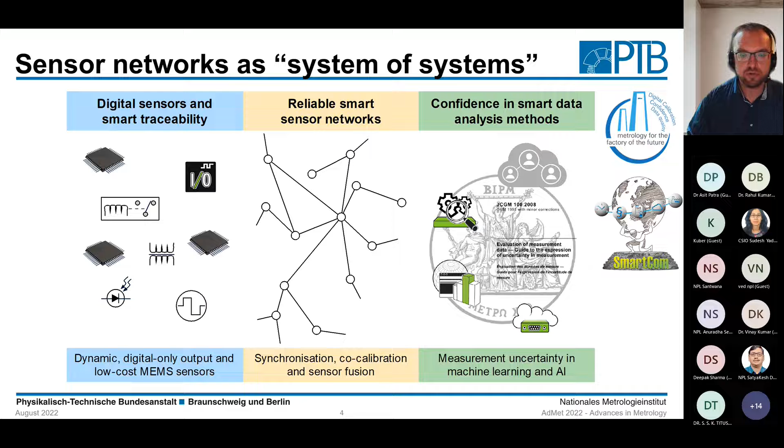You see many challenges ahead of us as metrology institutes and laboratories.

Even when you look at individual sensors, we see increasing complexity. Of course, that's nothing new—we metrologists are used to instruments becoming more complex in their evolution and development. But we see a kind of disruption in the last couple of years because of the increasing integration of digital technologies into sensors. So you have more and more a combination of the actual physical measuring elements and digital elements, the software.

The software may try to compensate for unwanted effects. It may combine several measuring elements inside the instrument to derive a measured value. Or it may do even more, like an internal calibration based on some reference already integrated into the box. This is challenging for metrology because, at first hand, we don't have access anymore necessarily to the actual measured values, only to the pre-processed values.

Does that mean our calibration standards are still working for this? We don't know yet, or at least I haven't heard of anyone who knows that for sure.

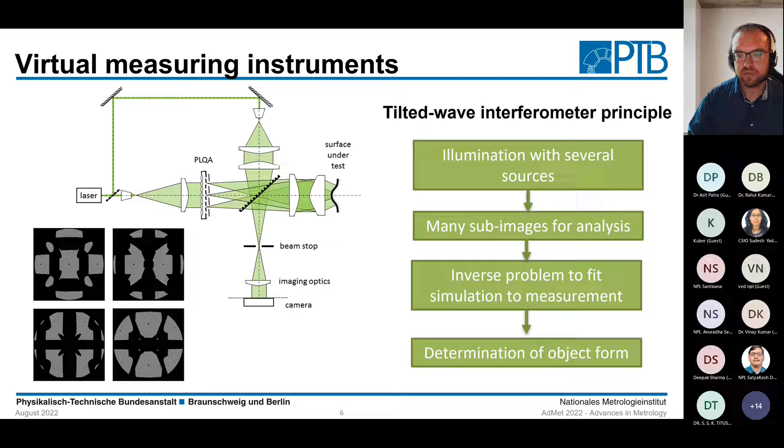Then in a simulation, you adjust the model of the surface under test, your measurement arm so to say, until the simulated pattern looks as close as possible to the measured pattern. Only this combination of physical and simulated measurement gives you the measurement result. How do you calibrate such a thing? How reliable is it? What is the quality of this? Many questions need answers when we want to have metrology available for these kinds of instruments.

Metrology institutes are only one, an important but only one element in the quality infrastructure, in the assessment and assurance for trustworthiness of products and services. It starts with the development of a product, then you have the conformity assessment, the manufacturing, the product is distributed on the market, it's in operation, and then at some point in its life cycle, it is recycled.

Now, with digital transformation, we see more and more examples where this physical life cycle is accompanied by a data life cycle. So you have data that is created in the design and development process, the data from the conformity assessment, the data that is gathered in the field during the distribution and operation of it, and that then may later also be used for the recycling.

Of course, there are many bodies, institutes, companies, and places where this digital information can be enriched. Right now, it is distributed across various bodies and data places. In the future, though, this information may be gathered together, summarized into what we call a digital product passport. Because this gives us a lot of benefits.

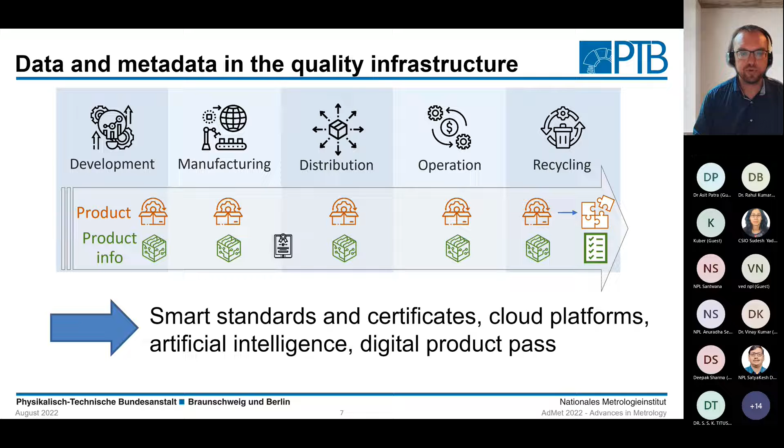certificates in metrology and conformity assessment. The increasing use of cloud platforms to bring together different data sources. The use and integration of artificial intelligence and early steps towards a digital product passport.

Again, many different institutions and bodies and areas come together here. We have the regulatory framework, the standardization, and then the metrology, accreditation, and calibration interplay for the non-legal metrology part. We already see developments like digital certificates for calibration and testing, the early steps in end-to-end digital processes with the aim to make the quality infrastructure more efficient, but also with the need to have harmonized interfaces and data.

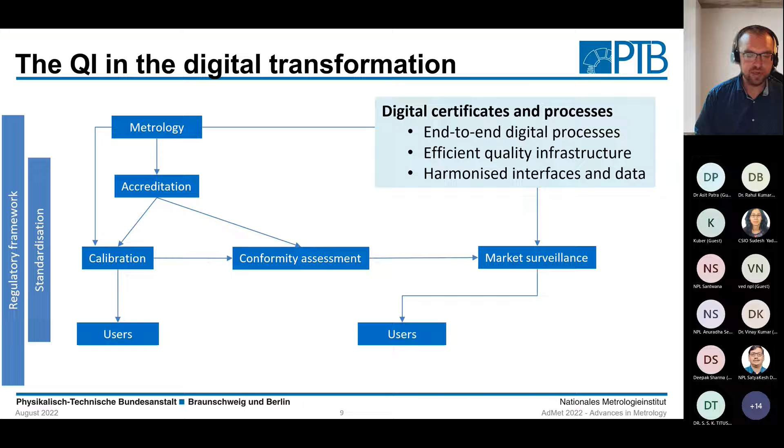And the needs here become even more clear when you look at the legal metrology part of it. Here you have the conformity assessment and market surveillance that also need to be taken into account. And of course, this needs to be interoperable with the developments in accreditation and calibration for the non-legal metrology part. So we need to work together in order to have an interoperability of the developments.

And to start this interoperability, let's have a look at what is going on in the standardization community. Just recently, there was published a white paper on scenarios for digitizing standardization and standards. And in that white paper, they have presented these 5 levels of digital maturity.

It starts with level 1, where you have a digital document, so the standard as a PDF document, for instance. Level 2, you have a machine-readable document, so you have some structure in the document that can be used by a software to extract certain information, certain paragraphs from a search, like give me all the definitions or extract the requirements and so on.

Level 3 is then going even further by having machine readable and executable content. So you have the information that is contained in the standard provided in such a way that the machine can extract the information, not only the text paragraph. And machine interpretable content means that the machine can also work with the information itself.

Then the white paper adds a level 5 to that, looking far in the future, and that is machine controllable content, saying that a software may be able to adjust a standard or compile a standardization document. Of course, there are many things that are required to achieve this level 5, and it's clear that this is something we will not see in the next 5 or 10 years, but maybe in 15 or 20 years, first steps in this direction may be seen.

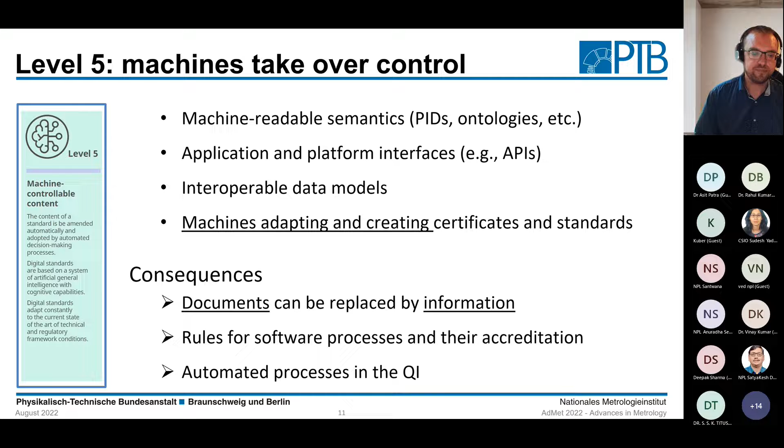It may be of interest and you may be curious why it's so, but you don't need that information. You only need to know: will my flight be delayed? Will it be cancelled? Because then you have to take some action, and you need a high level of confidence in that information. If it's wrong, and your flight is not actually cancelled but you take some action, then you're losing money and time, and of course you're angry. So this is an example of extracting the information you need at a certain time without needing a document or the whole set of information at your fingertips.

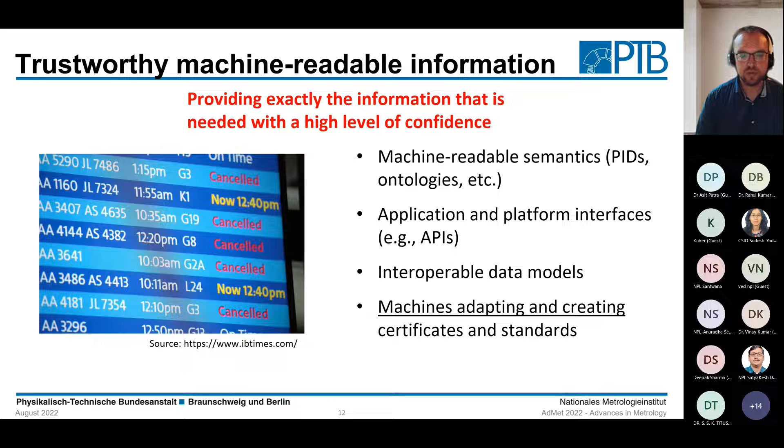Of course, we start where we are now, and in most areas this is level 1: we have a digital document. We may provide the certificates as a PDF document. Standardization communities are already providing standards as PDF documents for download. But how do we create those?

This process can also, and needs to, be digitized. That means, first of all, that from the placement of the order to the provision of the certificate, we have a working digital process internally, that we can use electronic signatures and seals not only internally or nationally, but accepted internationally - which is not that easy. And we then provide the certificates and reports at least via email, so digitally, ideally over some customer platform or service provider.

Already this step can be challenging when you want to do it right. Doing it right means that you don't have different islands of digital solutions in your process internally, but that the data coming from the customer's order placement is used in your internal document management system together with all the metadata. This metadata is then automatically provided to the laboratory, to the place in your institute doing the actual examination.

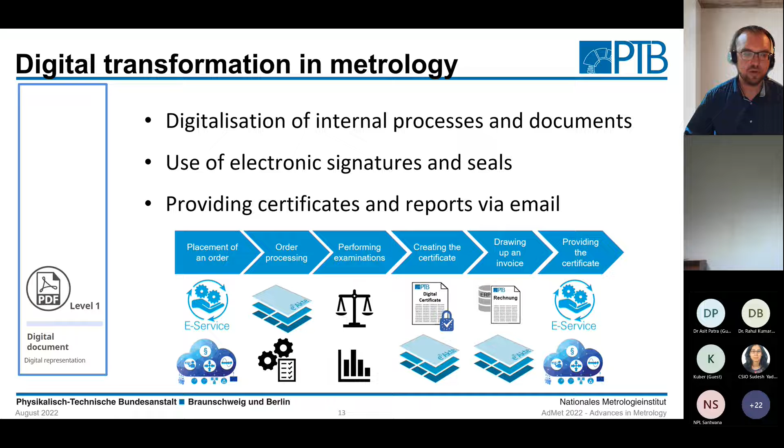Like calibration or conformity assessment - so that this information can then be enriched, provided, and put into the certificate, and then an invoice is created and the certificate is provided. So the information is handed over from one step to the next without a human needing to manually type something in, copying and pasting it from one platform to another. To do this right is already a challenge, depending on how well prepared you are with your processes.

From this, we can then go to level 2. That means we have to break up the PDF document and use something that provides us with a structure that can be searched for. Like you may have, as in an XML document, certain structure elements saying 'here's a measurement result.' And then within that measurement result you may have certain substructures, like in a hierarchy, that you can again search. So you can then write software that extracts the information.

Of course, it's still a manual workload, because as a human you have to look into the structure of such documents beforehand, and you have to very carefully prepare the software and so on. You can, however, specify the type of information easily in such a structure, and you can then have the software parse the document to extract that structure.

For instance, you can have software parsing all the measurement results in a digital calibration certificate, and then printing them out to you on the screen, or providing them via an interface to another platform in your process.

One example where we can go beyond calibration certificates and certificates of conformity is if we were to take the existing BIPM International Vocabulary of Metrology, the VIM, and further develop that into an XML or similar structure, where you can have a searchable structural hierarchy of terms, higher terms, relations between terms, and so on.

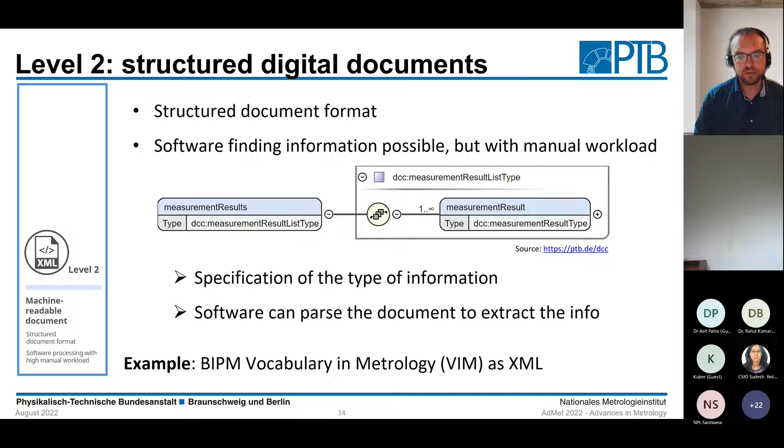Still, the information contained in the definitions in the VIM, the information contained in the individual measurement results elements, is not machine readable. This would require level 3, meaning that the actual content can be discovered and understood by software, meaning the relation between different interfaces, between different sources, can be understood by a software. Is the word 'force' or the representation of the unit of measurement in one document related to that in another document or in the database that I have here?

When I want to integrate the information from a digital calibration certificate into my existing internal database of measuring instruments, I need to have information about such relations. Otherwise, it's still manual work to adjust units of measurement, to adjust values, to adjust taxonomies, vocabularies, and so on. With level 3, we can do this automatically based on further detailed XML tags specifying the different elements.

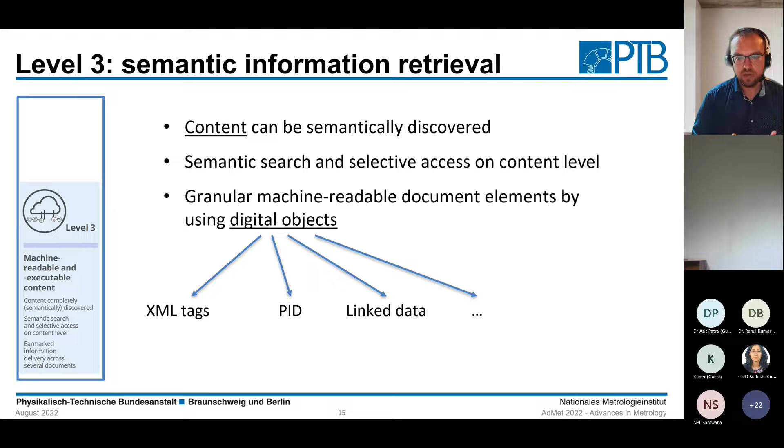Persistent identifiers, for instance, an identifier for a certain unit of measurement that we can refer to. When it's in one document using the same PID as another document, or in the certificate the same as in our database, then we can be sure that it's the same unit of measurement and it's related. Or we can use linked data, which is a structural, semantical way of describing the meaning of vocabulary and semantics. It means that we have to become much more granular in the way we specify the documents.

Here's one example of how that may look like. You may have in a digital calibration certificate a measurement result that in detail looks like this. It has a label, you're saying it's a force value. You have the actual value, and they have the unit of measurement written in a machine interpretable way. There are many different ways on how to structure this. This is one example.

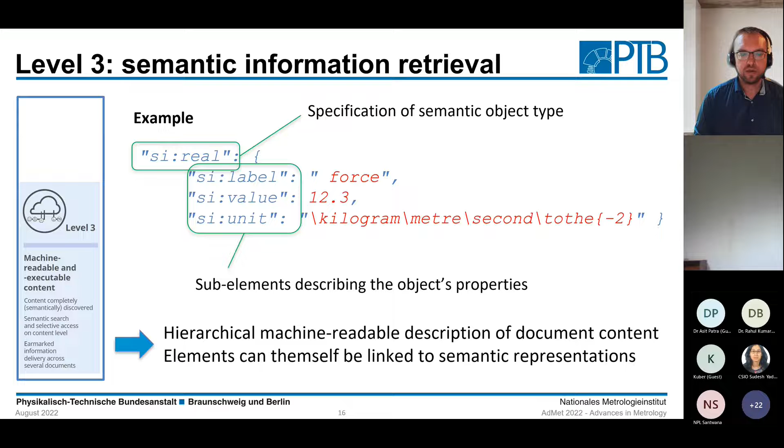This can be implemented quite easily in existing documents, but of course we have to have interoperability, so we have to at least find a way to how to harmonize and interpret these beyond different domains and use cases.

Level 4 now extends this even further by also having the context of, for instance, the measurement of force available in a machine readable way, so that you can extract the information and make use of it automatically. So you have the software automatically working on the data without a manual workload, like the integration of the information from a calibration certificate into your internal database, or the interpretation of a standard to automatically adjust the calibration infrastructure or setup in your lab so that you can perform a calibration based on that standard, or at least check whether your setup is in accordance with the standard.

However, it means we have to replace the now often implicit definitions and interpretations in our standards and guidelines by some explicit semantic relations, because we don't want the machines to interpret wildly what to do with the information. We want to be sure that when we have automation, it works as expected.

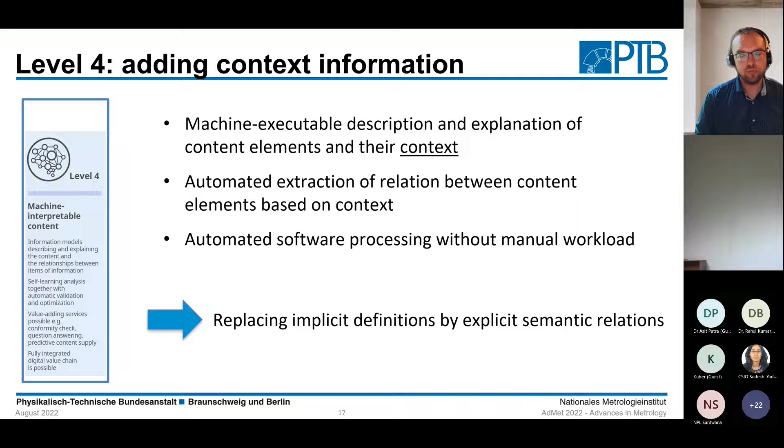It starts, and we are working on that internationally, on the digital representation of units of measurement. It also means we have to make documents like the SI brochure and the VIM machine readable. First of all, because it is a way for us to learn how to formulate things. It can then be a kind of template for other areas, for guidelines and calibration, for standards in metrology and so on, that can use the way we use in the machine readable SI brochure and VIM, and take that up in other areas to again have interoperability. It also means we have to talk about interoperable terminologies and vocabularies.

The VIM is a starting point. We have the basic vocabulary of metrology there with human interpretable definitions. It's only a glossary. When we have a high level of automation, according to this graphic here, we need to go beyond the glossary. We may need, depending on how much automation we want to have, to go up to ontologies - so explicit semantic representation of definitions, relations, and interconnections between terminologies and vocabularies.

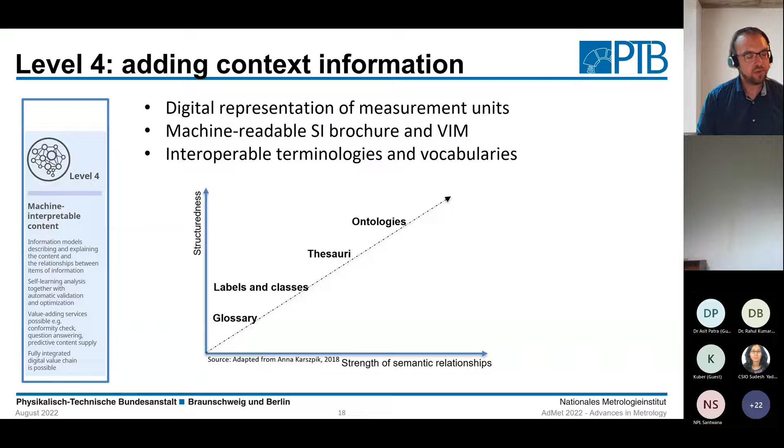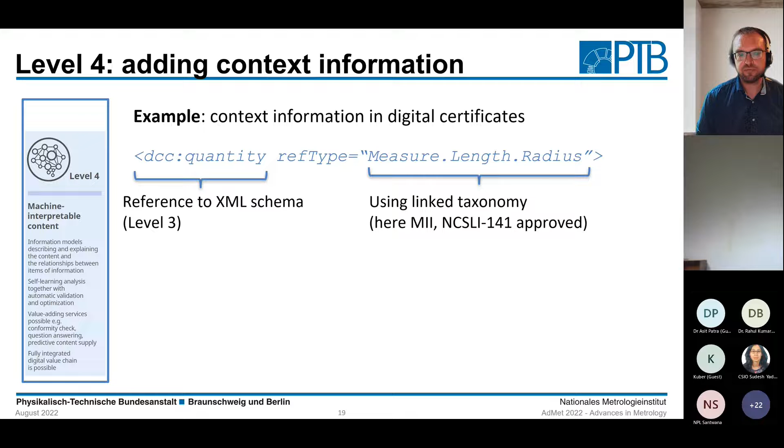One example where this is of use, again with the calibration certificate, is that we can specify using a linked taxonomy what this measurement is about. Here it's a measurement of the radius, the length of a radius. So the context can be interpreted by software, relating this information to information from another source, enabling automated integration and use of the certificate's information.

And this is necessary because we are not doing this for our own purposes. The certificates we provide in metrology are used in accreditation, in calibrations further down the calibration hierarchy. They're even used in conformity assessment and market surveillance, and finally by users for their internal quality management systems.

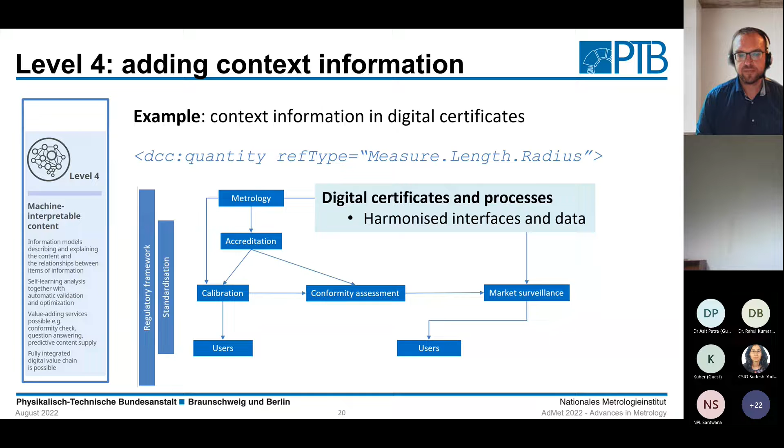To take a step back from all these semantics, ontologies, and technical details, let's sum up why we do this. There is a digital transformation in society and economy, and we have to address these developments, including more and more large-scale networks of sensors with flexible topology, meaning sensors being added, having failures, or even being mobile, placed on a car, other vehicles, or a drone.

People use dashboards to assess the situation and the data, compressing the information, meaning individual measurements are not as important anymore. We will see more and more data-driven decisions and automation based on individual measurements, but increasingly also on networks of sensors.

It also means algorithms and software will become as important as the actual measurement, with more sensors integrated with digital technologies, software and algorithms trying to compensate for unwanted effects or combining elements of different measurements to derive a measurement result.

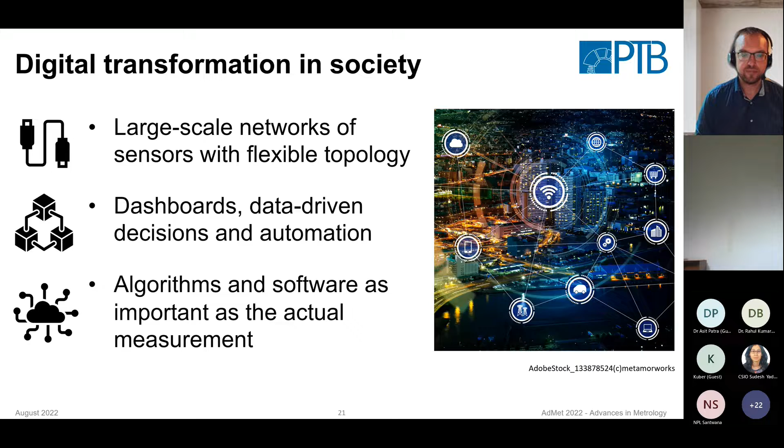It means for us that we will have more possibilities and opportunities for our own digital transformation, so automated processes in our laboratories and institutes. We will be requested to have digital interfaces between our systems and those of our customers, like providing the digital certificate not via email but directly via a suitable cloud interface.

We will have to build up competence in data science and artificial intelligence applications because, to be honest, this will be the future. These systems will be integrated into metrology systems, and we'll see more interplay between cloud infrastructures and on-premise solutions, meaning not everything will be in the cloud; we will have localized solutions for measurement and for provision of services and data.

Thank you very much, and I hope you have some questions.

Thank you very much, Dr. Antoine, for that very interesting and very comprehensive presentation on this very topical issue. Now, this is open for discussion.

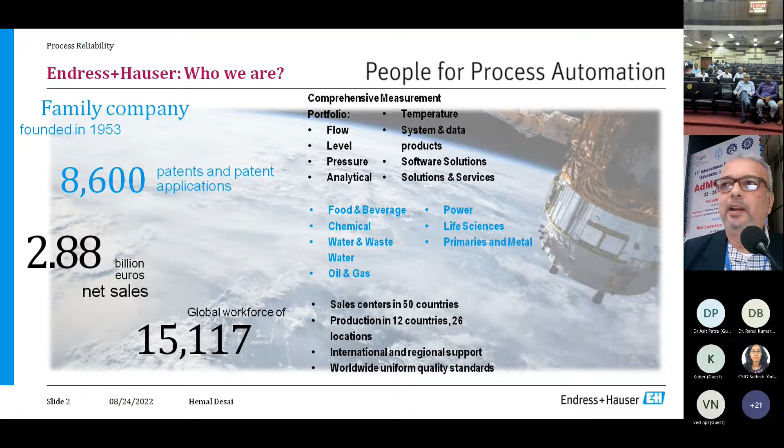We are part of a Swiss company, and as you know, Swiss are very precise. You hear about Swiss banks, Swiss chocolates, Swiss watches. But many people are also aware that Switzerland is a land where a lot of precision instruments are made. Endress+Hauser has been in the process industry for the last 70 years, making very high precision process instruments and technologies. So I represent the company. We have been in almost all process industries, including food and beverage, power, life sciences, biotech, chemical, oil and gas - any process industry you go, you will find our equipment being used for the last 70 years. In India also, we have been present for the last 40 years now.

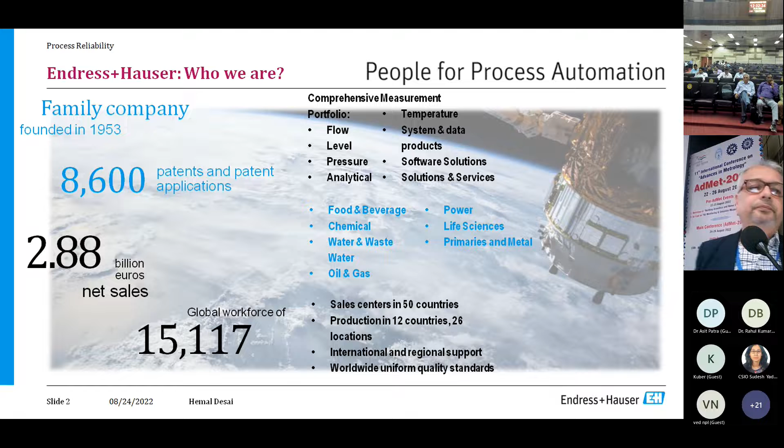So when you go to a process industry and talk about reliability, reliability means different things to different types of people. Some people think of reliability as how well I am able to control my process. So if you ask a process engineer or a person basically looking after the process or quality of the product, he is worried about how well he's able to control his process.

There are people who define reliability as reducing risk - how much risk do I have in my plant? There are some people in the industry, mainly maintenance engineers, who want to avoid an unscheduled shutdown. They're worried about what percentage of the time in a year is my process available to me for production. And then there are utility engineers who worry about how to reduce energy consumption, utility consumption, and the cost of producing the product.

So these are different definitions - different people look at reliability in different ways. What we are going to focus on in this presentation is basically the quality perspective and the cost perspective, and we'll also look at it from availability and safety perspective. So we'll try to combine all of this from a process instrumentation point of view, and I'm going to present a couple of slides from that perspective.

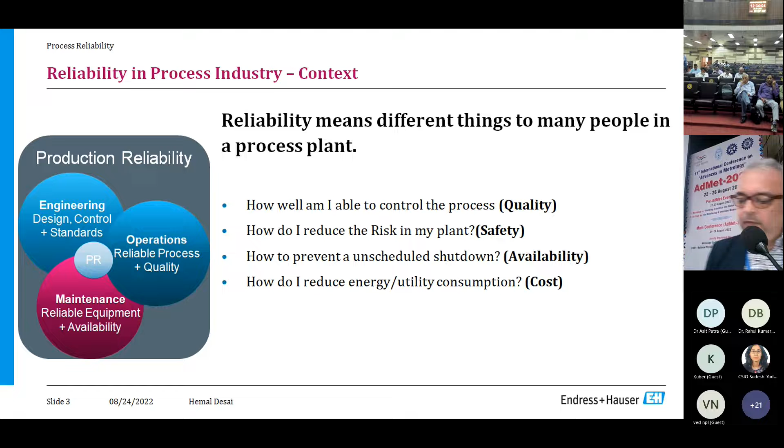So the reliability journey in process control starts from measurement. Measurement is the first thing, because it's popularly said that whatever you can measure, that only you can control. So if you cannot measure something, you cannot control it. And if you cannot control something, you cannot improve it. So all of these are related, and the first starting point of the reliability journey is measurement - that's where we come in, or that's where I come from.

When you talk about measurement, the most common dilemma today in a process plant is that you have hundreds of measurements being done. What is the integrity of that measurement? I am seeing some measurements on my control system screen - what is the integrity of my measurement? What is the confidence level I have in that measurement? And how do I ensure this confidence level is there all the time, and that my measurements are accurate in real time?

This is the most common dilemma you will find in any process plant - especially in some plants like oil and gas or food and beverage, life science, this is very critical, because your entire quality of the product depends on how accurately you can monitor the process values.

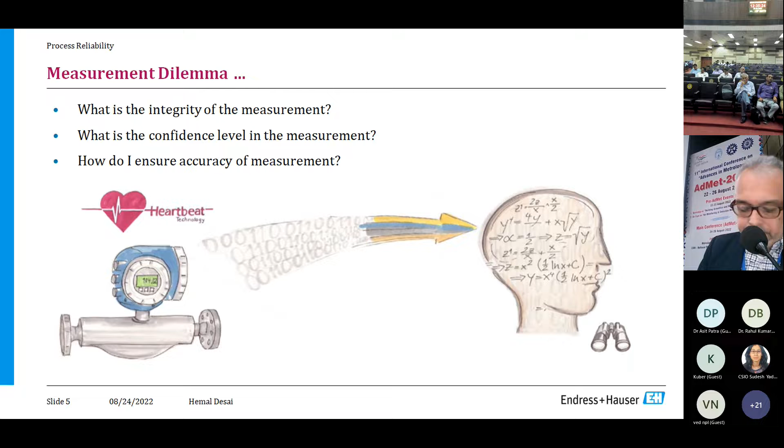Just to give you an example: if you go to an oil and gas plant, the expectation of a process control engineer would be how can I reduce the variability in my process loops. This is the key expectation of any process control engineer in any process industry - how do I reduce the variability in my loop?

Why? Because any plant or production facility consists of many such loops. And if you are able to reduce variability in all these loops to a certain extent, the end product you get out of this plant will be on spec - your quality of the product is A1. You want a certain quality of product, and this is what you will get if you are able to reduce the variability across all the loops. What we are essentially saying here is that if you can reduce variability, you have very tight control.

When you have tight control, you have quality on spec. When you have quality on spec, my cost of production is reduced, my utility consumption is reduced, my energy consumption is reduced. So I have the most efficient way of producing the product at very high quality. That's how a process engineer looks at it.

There are many variables which can disturb or affect this. For example, faults in any of the control elements or measurement elements—if there's any fault, then you are in for a surprise. Or the accuracy of measurement is also a variable here. Of course, there are many other process variables included, but I've just tried to pinpoint some of the variables which we'll be concerned with.

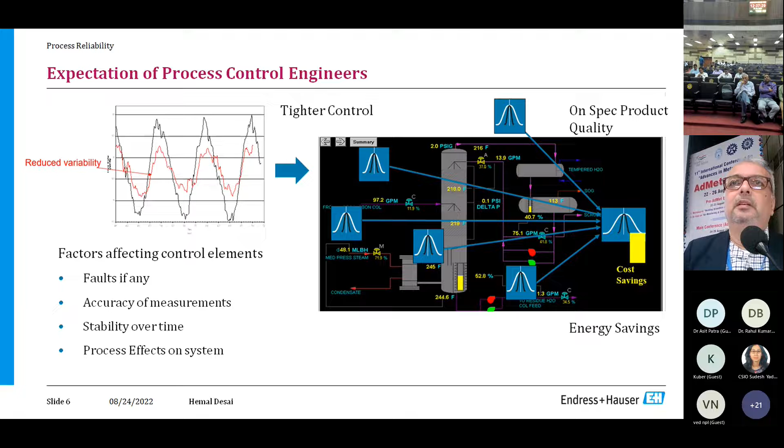Stability of measurement over time—how stable is my measurement? My accuracy may be fine, but if the measurement is not stable over a period of time in a process plant, then I have a problem. And there are process effects, which I already talked about. So there are some variables which really can disturb this process variability in a process plant.

So one of the most traditional ways of ensuring that we are doing a very good job in a process plant is to basically do a metrological calibration of the equipment, both measurement as well as control elements, over a periodic period of time. Typically when a plant is being started, you get equipment from the manufacturer, and before it ships, it's usually calibrated as part of the manufacturing process. Once the equipment is received at the site and put into operation, again most of the time the calibration is checked, and then you have a preventive maintenance strategy—let's say every once in a year—to ensure the calibration is still on spec, or to recalibrate the device.

So you establish a period of time. Sometimes it's the preventive maintenance strategy—every once in a year I would calibrate, let's say, a flow meter. Okay, so that's usually the case.

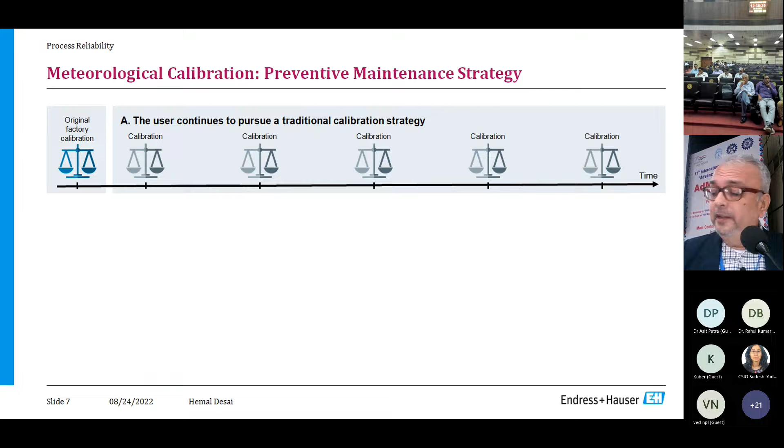But from an end user's perspective, this is an issue—you have to remove the equipment from the process for calibration. And some of the processes are very critical. For example, you have custody transfer process, or a process where you're dosing something or mixing something. Then it's very difficult to remove an equipment from the process because you have to disturb the process, stop the process, and remove the equipment.

Sometimes you have to send the equipment from one end of the country to the other, and this takes a couple of days. So you have no measurement during that period of time. And again, when you receive the equipment back, you have to put it back in line by stopping the process. So this is, from the user's perspective, something he wants to avoid.

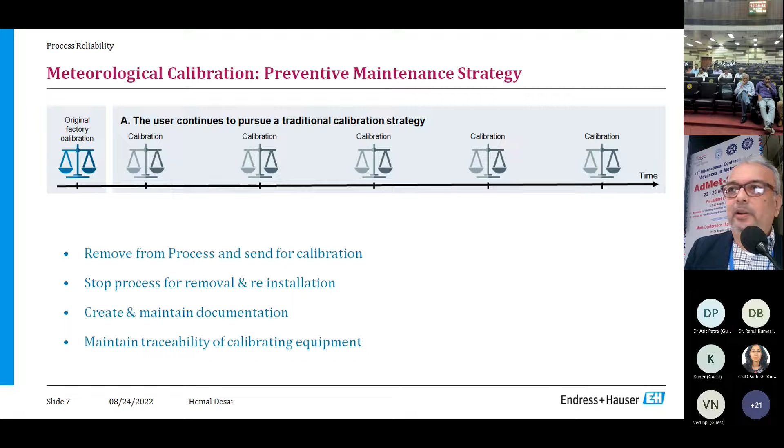And then there is documentation—you have to maintain documentation, you have to maintain traceability of the calibrating equipment, sometimes at the user's end or at the lab. So all these parameters play a role in how you maintain the calibration of the device. So what is the easiest way out? Don't calibrate. Most users, even though they have a preventive maintenance strategy documented, they don't calibrate. This is actually what happens in a process plant.

So Endress+Hauser realized this because we have been working with so many end users in process plants, and we introduced a digital technology known as Heartbeat Technology. Why we called it Heartbeat was because we say this technique is like the pulse of the measurement. If I just take an analogy—if I'm not well and I go to a doctor, the first thing he basically checks is my pulse. So this is as good as a pulse of the measuring equipment which we produce and sell to customers.

So why? What would this do? Basically enhance the reliability and confidence level of measurement. We are trying to give something to the client which can enhance his confidence in the integrity of measurement.

The first layer is the diagnostic layer. The second layer is the verification layer. And the third layer is the condition monitoring layer. So there are three layers within the device.

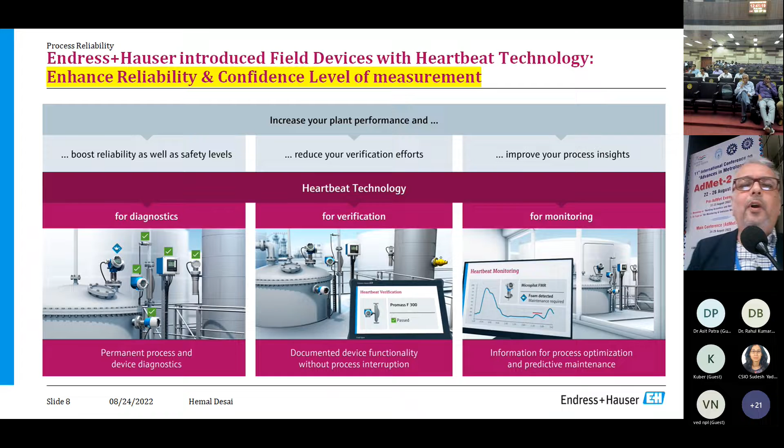Let me give you a brief overview of what each of these layers do. I'm happy to be doing this presentation after a couple of presentations today morning, where you'll be able to connect a lot of things I'm saying to those presentations.

The diagnostic layer is concerned with continuous monitoring of each and every field device, 24/7. With digitalization, each device today is almost like a computer in the field. When somebody talked about nodes, yes, this is a device acting as a node. Today you have IP-based sensors.

IP-based sensors are the trend we see in the process industry. In the old days, you had a lot of equipment connected by wires to each other. Today we are seeing a trend with machine to machine or Industry 4.0, where equipment is connected not by wires, but probably by web. So this is the trend going on. And all this AI, ML we saw since morning, they are all tools being used in this entire ecosystem.

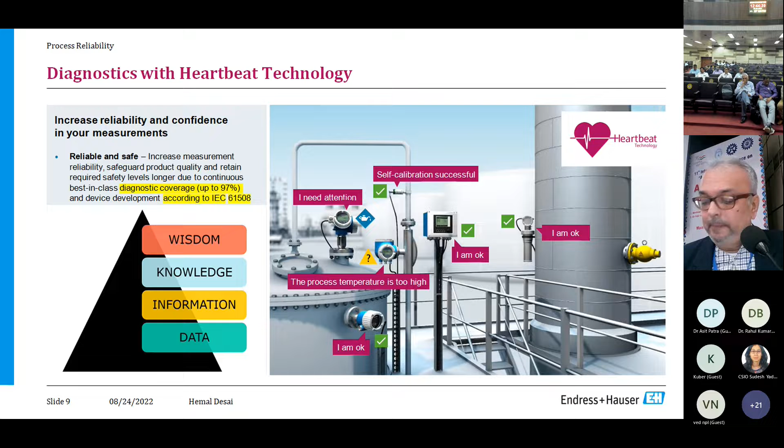The second layer is known as verification. We all know calibration is basically a metrological assessment of a device. We are not trying to confuse with calibration - we are talking about verification, which is a comprehensive functional assessment on demand. On demand means just with a push of a button for any device, you can do a functional assessment, to check whether you can still have confidence in the measurement or not.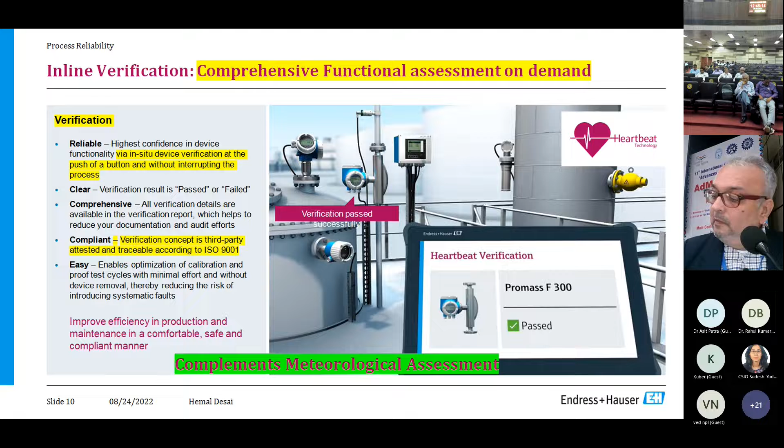When you do a verification, what happens within the device is that there are internal factory references built into the electronics, which are compared to the current integrity of measurement - not only of the measurement but also of the mechanical elements in the sensor, the electrical elements, and the outputs. All these are compared to factory references. How are these references built in when each equipment is manufactured? They are created by calibrating those references against some traceable references. That's how this is done.

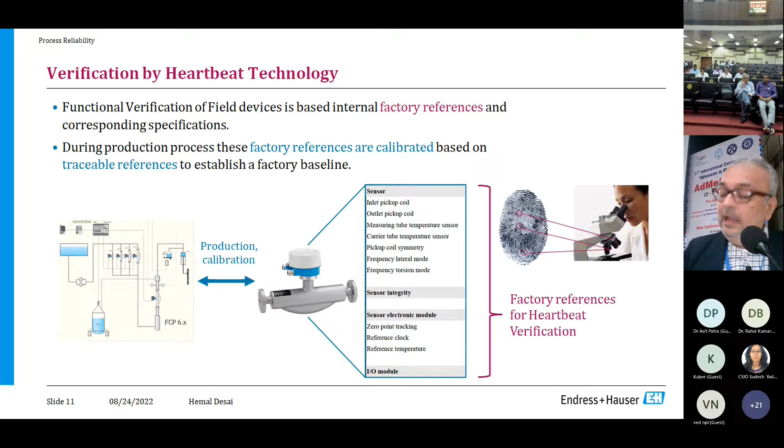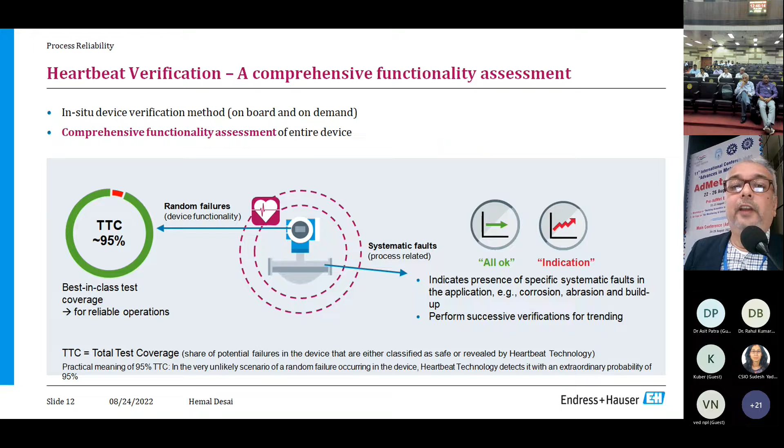When a verification is run on a process device, it takes care of both random failures as well as systematic faults. It generates a report, known as a verification report, within the device. Now this is very unusual - you usually generate a calibration report outside, but we are talking about a verification report inside the device, which can be extracted, printed, or stored.

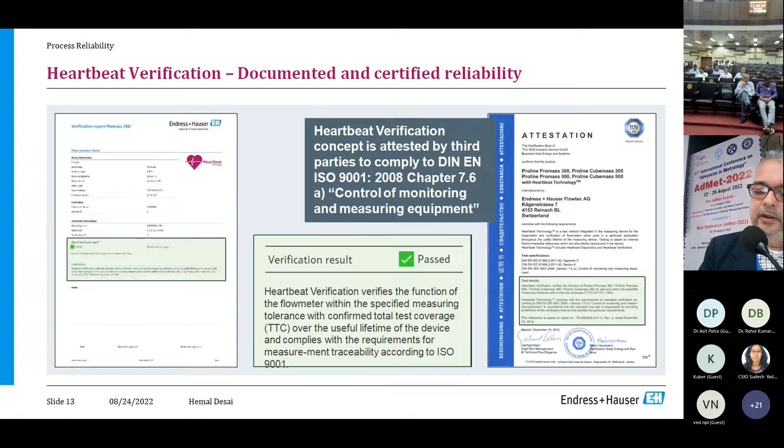This entire concept of verification, which we have developed for almost 10 years now, is attested by third parties to comply with ISO 9001, chapter 7.6, control of monitoring and measuring equipment. So this is one of the other layers which we bring into the reliability discussion.

This verification can be done from anywhere. We talked about digitalization, we talked about digital transformation. This verification can be done at the equipment level, from the control room, maybe using a tablet, using a phone if the process allows, and also via cloud from anywhere. This is the level of reliability concept which industry is actually using right now.

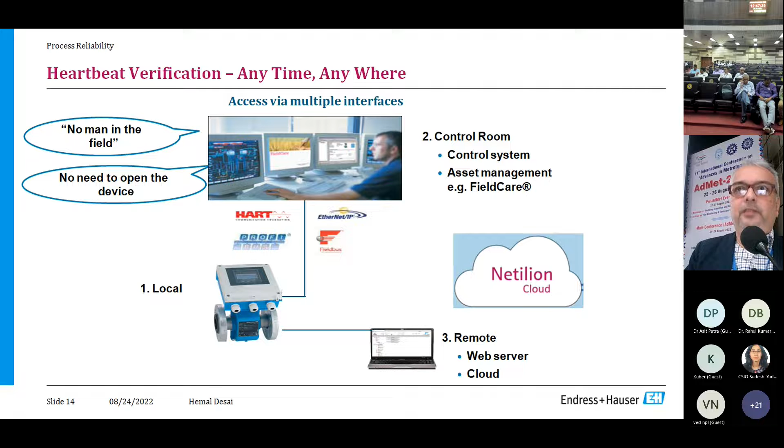So the verification brings in a lot of things. It is very fast because when the verification is happening, your process is not disturbed - the process measurement is still on. It is safe because you don't have to remove the equipment or send it somewhere. Confidence level is still big - you can have confidence that you can elongate your calibration interval. It is self-documented - your document is available anytime, anywhere. It is traceable to a certain extent, and it is in situ, meaning we don't have to remove the equipment from the process to do this verification.

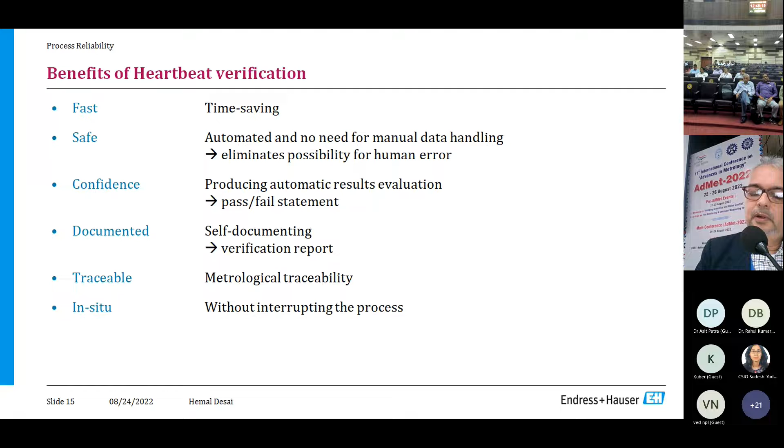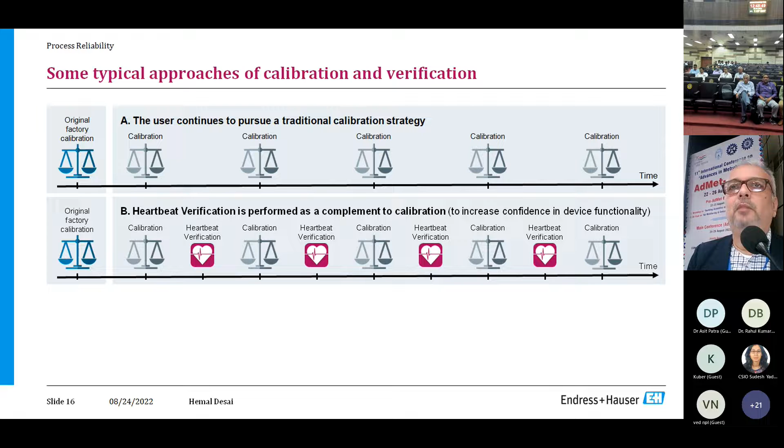So from the traditional perspective, when I had a preventive strategy of doing calibration every once a year, I can slightly tweak this strategy with the concept of verification - still doing calibration once a year, but every 6 months after the calibration, doing a verification test. I can study the results to see whether I'm still getting a good response from the integrity of the measurement or sensor, and if so, can I extend the calibration interval - say from every once a year to every once in 2 years? This will be a big help to clients who don't calibrate at all.

The last layer is known as condition monitoring. Any process device, once you put in operation, there is always some amount of slow degradation happening. For example, some corrosion may be happening within the device, which affects the integrity of measurement. Or there may be some deposition happening within the device over time, which affects its integrity. Or there may be abrasion happening if you have slurries or chemically active processes. Can we detect that?

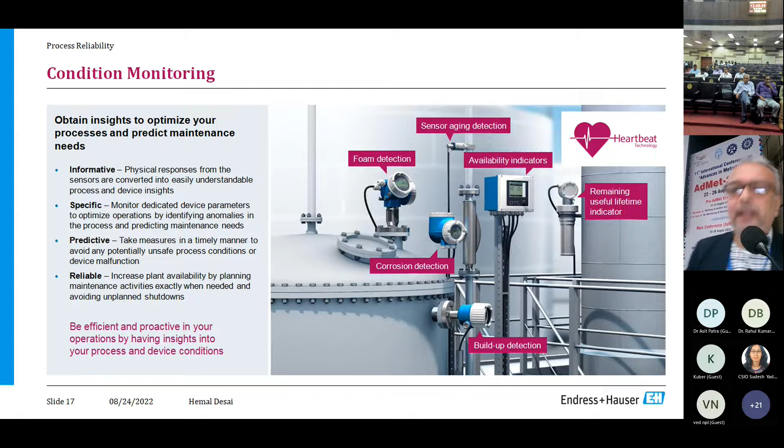Yes, as I told you, this data can be accumulated and trained over a period of time to give you information on how the integrity of the entire device or the process measurement is getting affected. Beyond a certain point, it can give you an alert that you need to really look into the reliability of measurement in detail. This is a new concept - when I say new, it's almost 10 years old. There are hundreds of plants in India using this, mainly because they want better control and more confidence in their measurement.

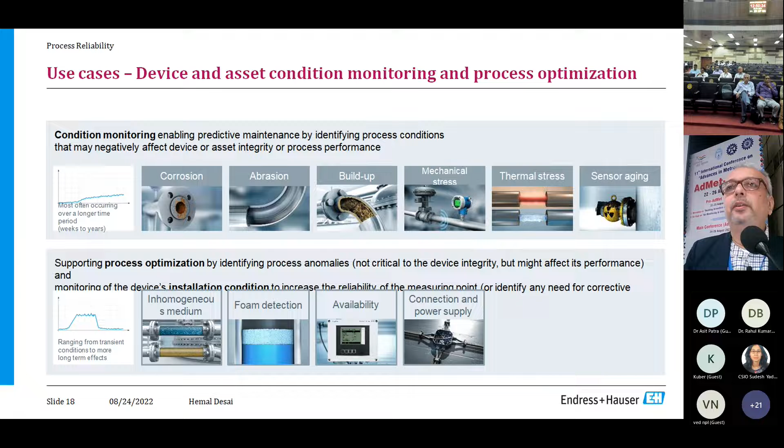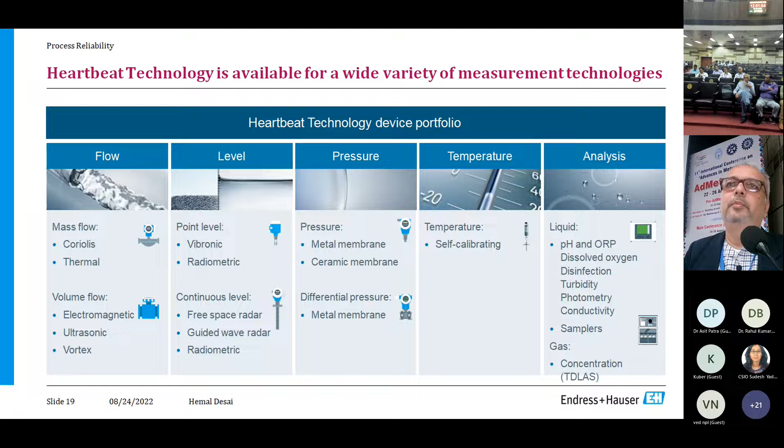And that's all I wanted to bring to you. Thank you very much. Just to give you another slide, more product specific - this kind of technique is available today in all different types of measurements, whether you're measuring process variables like flow, level, temperature, pressure, or liquid analyzer parameters. Many different kinds of measurement equipment have this concept available in the market now. Thank you for your attention.

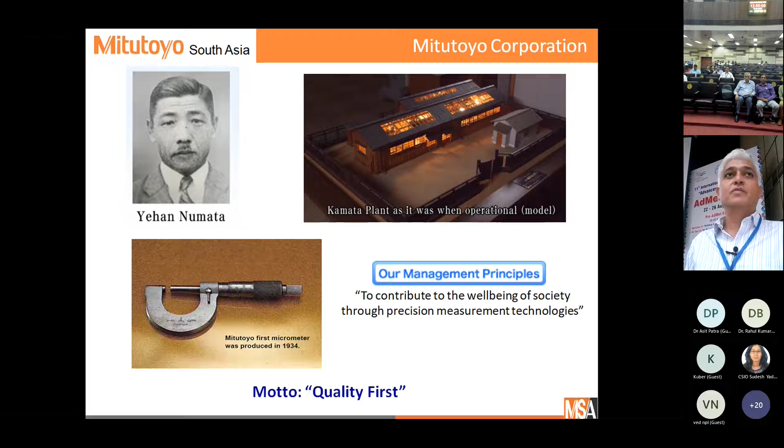Mitutoyo is a global multinational company. Our philosophy is to contribute to the well-being of society through precision measurement technologies. Our quality-first motto, which was founded in 1934, still remains today.

Today we've got 120-plus locations in more than 44 countries, expanding even today, with 16 plants. We focus on quality by maintaining our manufacturing in Japan even today.

I know there are a lot of questions regarding why not India, but there's a specific reason to that I won't get into right now. We do have collaboration across the globe between our subsidiaries, and of course we have collaborations between the R&D departments, be it in the US, Europe, or Japan.

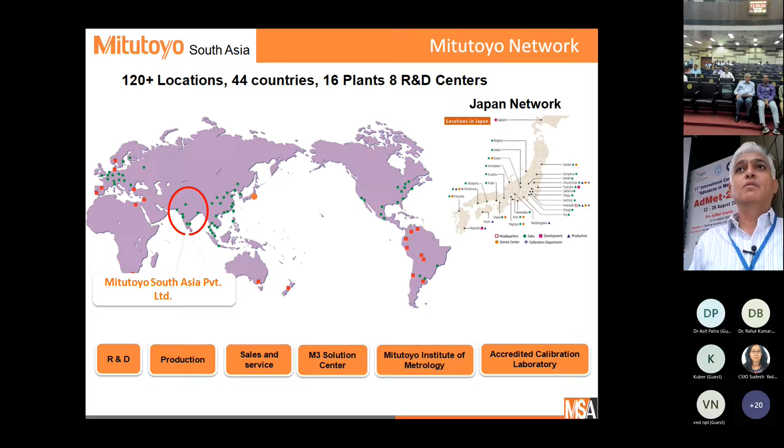There's a lot of feedback that goes back to our principals to say what the Indian market needs. Every market is different, and what we look at in India is also an interesting challenge today, a culmination of what we see between what developed markets are needing, but also shaping it with the Indian mindset in terms of the requirements.

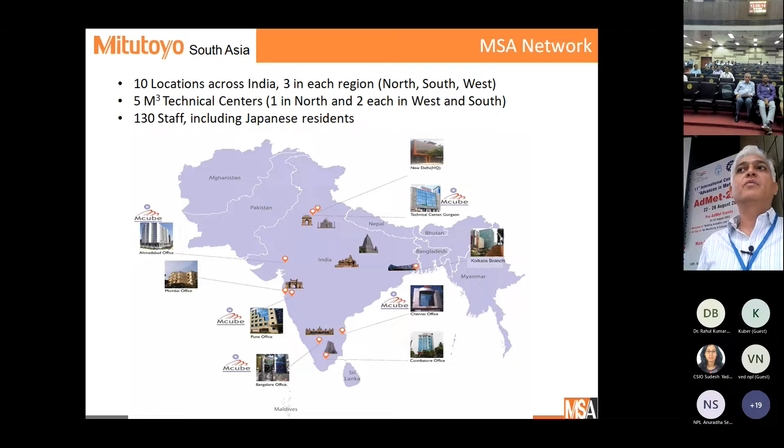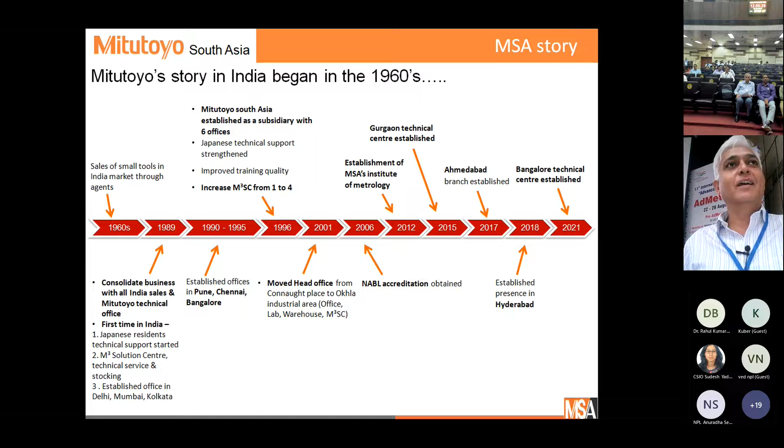In India, we've got 10 locations, 5 technical centers, over 130 staff, about 80% engineers. Our history in India began back in the 1960s. We now have 10 offices, and we just established our Bangalore Technical Center in 2021, right in the midst of COVID.

We support the entire industry with various support services: calibration, contracting, measurement technologies, gauging technologies, application support, software support, repair, service, and calibration, and so on and so forth.

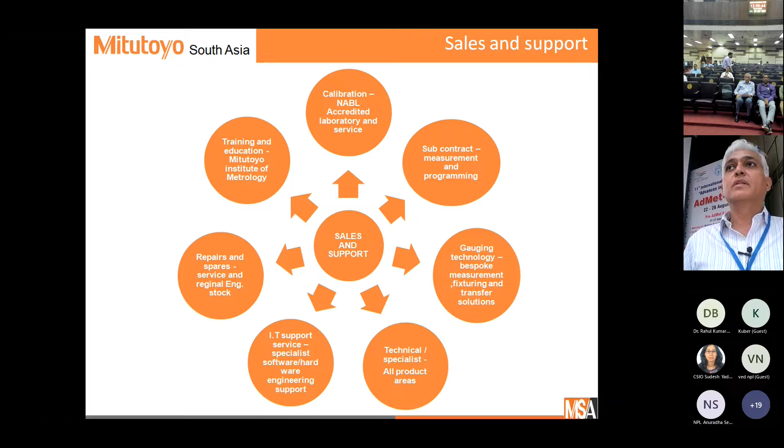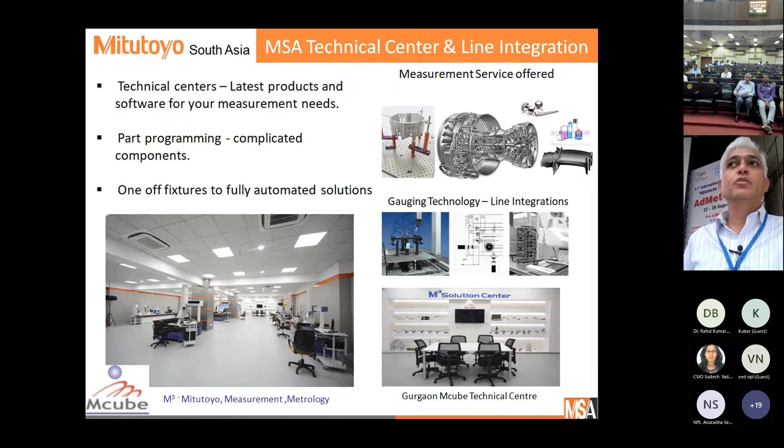Our technical centers are equipped with the latest products and software, part programming, complicated programs. We look at everything from the most basic measurement, like bottle cap measurements, to electronic and aerospace measurements, and so on. We can provide these solutions to our customers at the technical centers that we have.

Our focus is also in line with our Honorable Prime Minister's goal of skilling India. We have a motto that we produce the able person before creating a product.

We run our own institute, but we can only reach so many. So we partner up with various institutes to skill the workers and youth of India, because that's the need of the hour, frankly. Equipment and technologies are very much here; our colleagues in the industry are all global companies. So the opportunity of getting hold of technology is not so difficult, but getting hold of skilled people for the manufacturing growth required at scale, that's the challenge we have today.

We signed an MOU with the National Centre for Aerospace Innovation and Research, housed at IIT Bombay, to be able to provide solutions for aerospace measurements as well. We'll do a quick video now, so we talk about digitization.

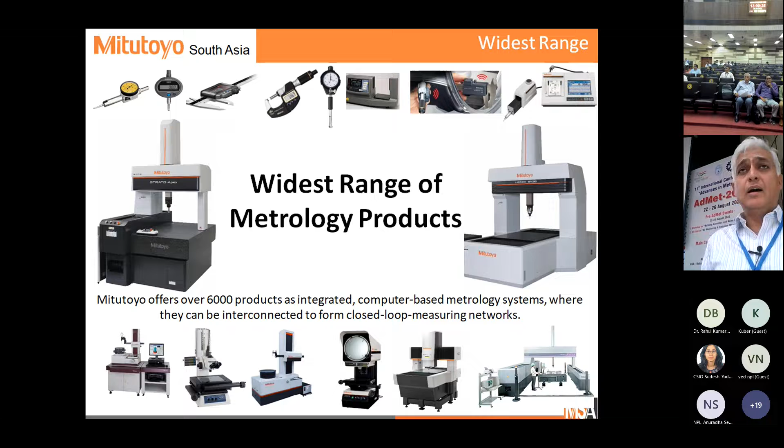I think folks would know about handheld tools in metrology. But let's talk a little about IoT in the measurement field. Today, increasing measurement efficiency by linking design and measurement, everybody wants efficient, streamlined services. This comes in the form of both hardware and software, not just one, and then linking of that hardware and software as well.

One is data capture, we'll get into that. One is data analysis, and this is where you take it to the next level of artificial intelligence. Today you have programmers writing code to generate a particular part program to measure a component. Tomorrow, by a click of a button, entering basic data such as PMI data, GD&T tolerances, and so on, you can generate the most efficient, optimized program possible, saving about 95-99% of time. Something that takes 2 days can be cut short to an hour. That's what IoT and digitization is in the metrology world today.

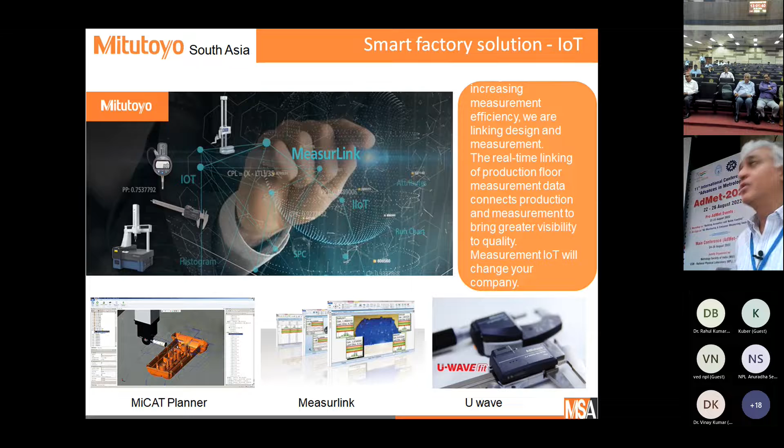We've got various aspects of IoT and smart factory in the measurement world: data collection, data analysis, monitoring, collaborations with robots combining robot and measurement techniques on the shop floor, automatic part programming with just one click, and feedback in the machine tools. Now more and more customers are saying they want the entire process automated, with measurement data going back to the machining center to tell them whether they're doing something right or wrong, based on data collected in real time.

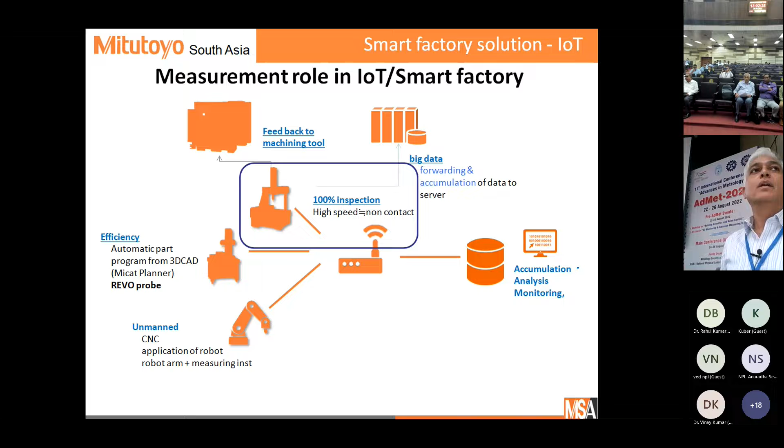So this is one software. Everybody is familiar with using a micrometer or caliper. Earlier, the technique was to read it properly, write it down, and enter it into a computer to make sure the data was captured. Today that's not required at all—you just click a button. This takes out errors that occur when an operator isn't skilled enough to read and write down data correctly every day, or makes a clerical mistake. All that is eliminated, and with a click of a button the data goes directly into the system without any issues.

So we talk about integrating factories, and what is that exactly, right? The old school, and even today I'd say too old school, is the system of inspection. You've got your quality inspection rooms where parts come in for measurements, whether that's on a sampling basis or a 100% basis, depending on the company and the product. That's normally what people deploy to ensure the quality of products produced are as per tolerances and as defined. But today, that's not enough.

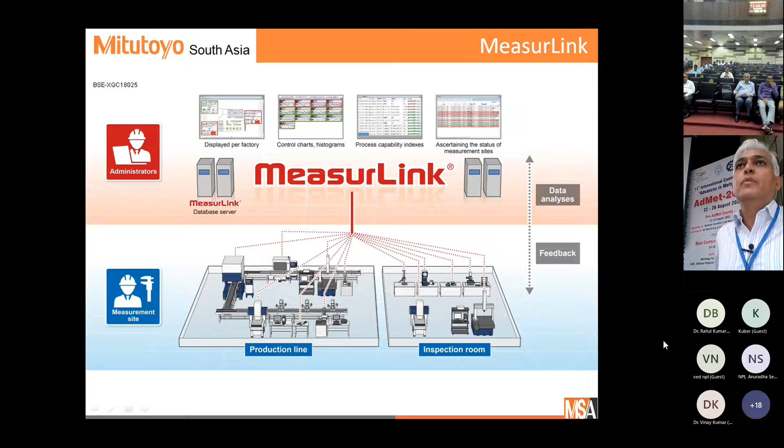They say, hey, we want all this data coming in from the production line to also flow into our quality management systems, and then be able to analyze it, act upon it, and take real-time decisions. For example, in the industry, when folks are measuring components, you measure something on a sampling basis, or measure something in a lab.

Your machining centers are not going to stop. Machining is ongoing, so they're still producing parts. And when you do find out that you've got an error and need to change the tools and so on, you've already produced n number of parts. That's wastage. That's a real cost to manufacturers.

So they say, hey, in today's day and age where competition is stiff, where efficiency and productivity are so required, we want this data from the production line coming to us in real time. This is what a software would take care of. You'll take the inspection room data, be it a CMM, roundness test, vision test, and so forth. You take your production line data with your measurement gauges, and bring it into a particular software.

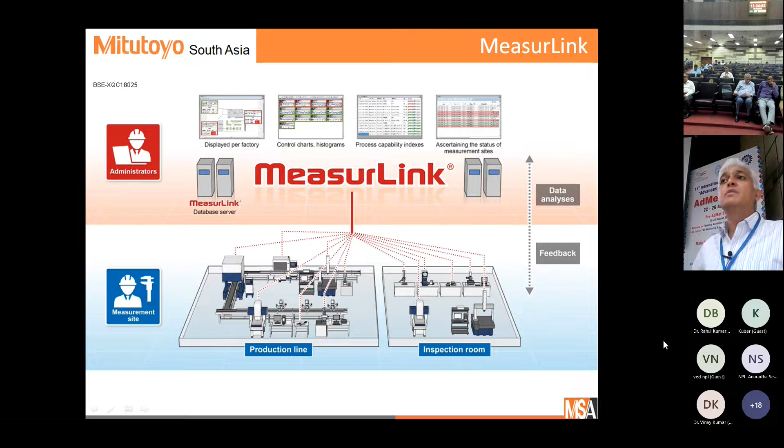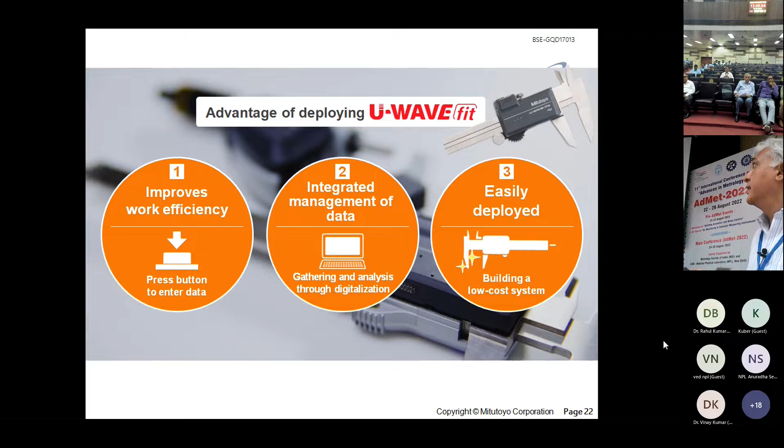With SPC, you're analyzing the data in real time. Then further from here, you can take that into your quality management system, and link it with a particular PLC system, right? So the advantage is it improves work efficiency, integrated management of data, and is easily deployed.

So you talk about smart machines, you talk about Industry 4.0. Let's go back in history to where we started. Back in the 70s and 80s, computers became mainstream and machine automation started, with CNC machines and so on. In the 2000s, we got self-service technologies deployed. Today, where are we? One would say, are we in cognitive machines? You're talking about neural networks, machine learning, deep learning, AI, and so on, or are we talking about integration with smart robots?

We'd say it's a combination of the two, because both are readily available. However, it's not fully deployed yet with all manufacturers to realize the full potential of what this new technology can offer manufacturers in the industry today.

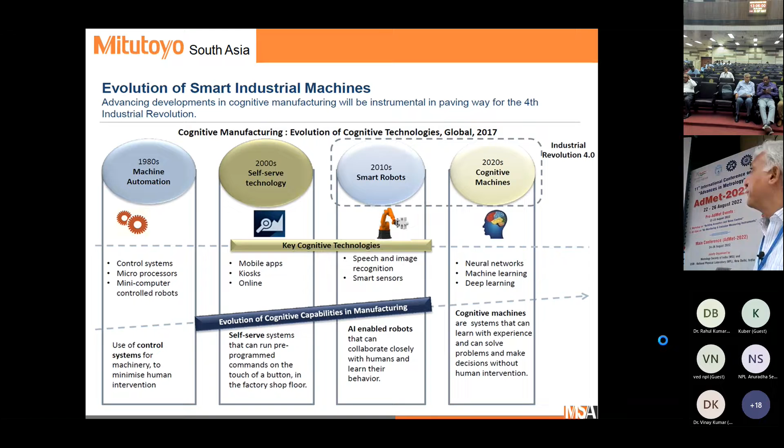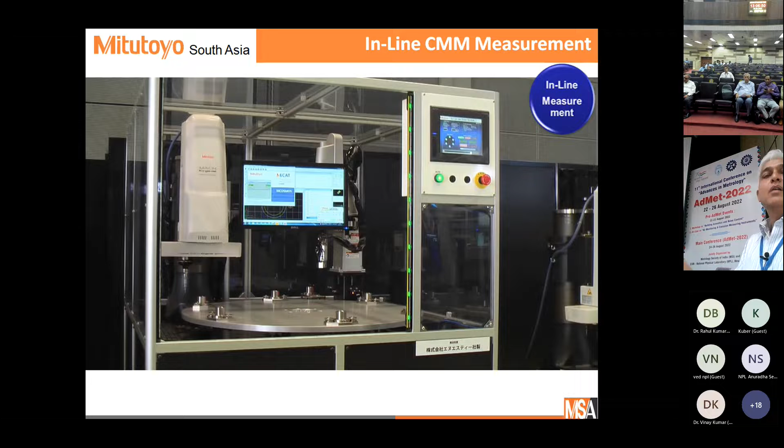This is an example of integration with a robot again, the robot and the CMM. You've got a conveyor here. You can see the robot picking up the components, bringing it to the CMM, and after the measurement cycle is over, determining whether it's within tolerances or not. You've got an automated process without any human intervention whatsoever. Everything is CNC controlled, everything is programmed, and you've got a fully automated measurement process in place.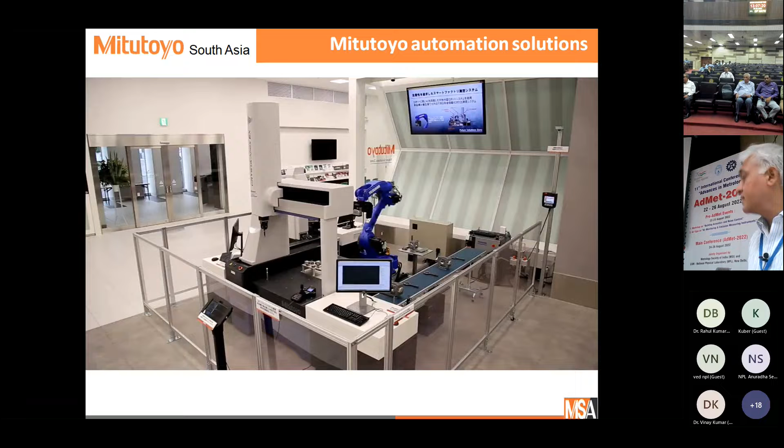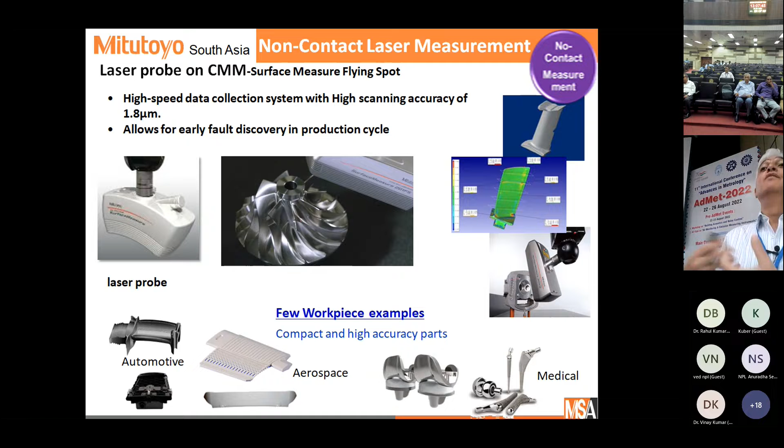So these are just additional products that we would be able to provide to our customers to enhance efficiencies. When you look at what folks are looking at, it's not just in the quality room, but they're now looking at these kind of measurement equipment for R&D purposes, reverse engineering, and so on. So these kind of probing systems helps with that particular process.

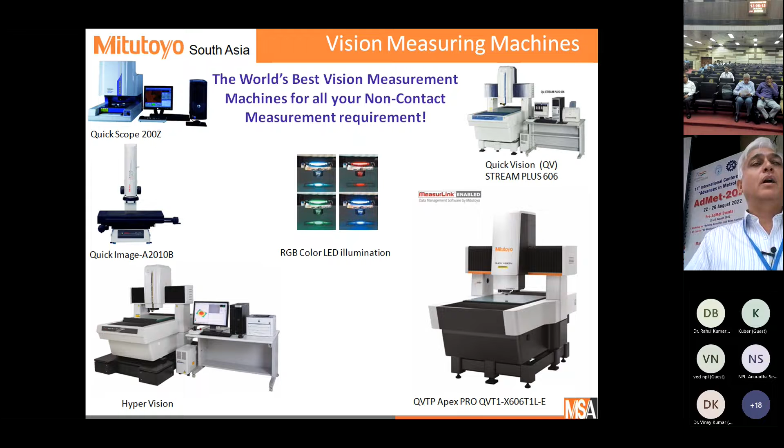Today you talk about Apple, Samsung, semiconductors. Our government is also focusing a lot on increasing this kind of activity for setting up manufacturing units in India. And the biggest adoption right now is going from tactile measurement to non-contact measurement because the parts are small. Tactile cannot measure properly in terms of what you need to measure.

So on that note, I'll end my presentation. And if there are any questions... You made a very clear presentation. Thank you. Thank you.

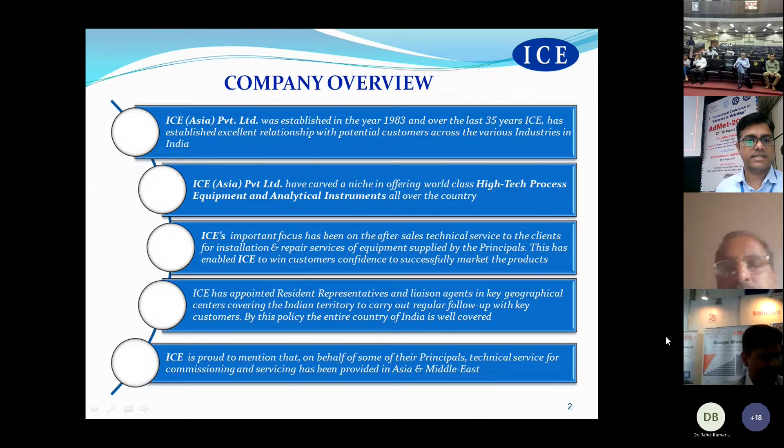ICE Asia is a 35 year old company, and we have been representing various overseas companies for sales and after sales service support. We are an ISO company, ISO 9001:2015 certified. So as I mentioned, we represent various overseas companies.

Amitech, Alpha Moisture - these are basically for process instrumentation. Then IROX, Protea for gas analyzers. ATG is again for biogas analyzers. Lumasys for IR temperature measurement, black bodies. And there are a few equipment also like Tetron for material handling and all.

So this may not be a specific product for metrology. We have a few products for thermal metrology, basically for IR measurements. This is an ultra fast, high temperature black body, with temperature ranging from 600 to 3000 degrees Celsius.

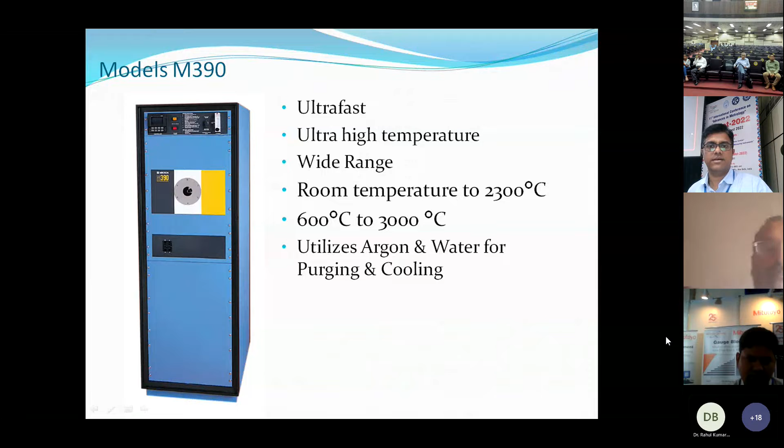Then we have a few test and measurement devices for vacuum applications, very low temperature applications, black bodies, up to very high temperature black bodies. We have night vision testing facility. Then we have collimators. Basically all these products are for infrared calibration and measurements.

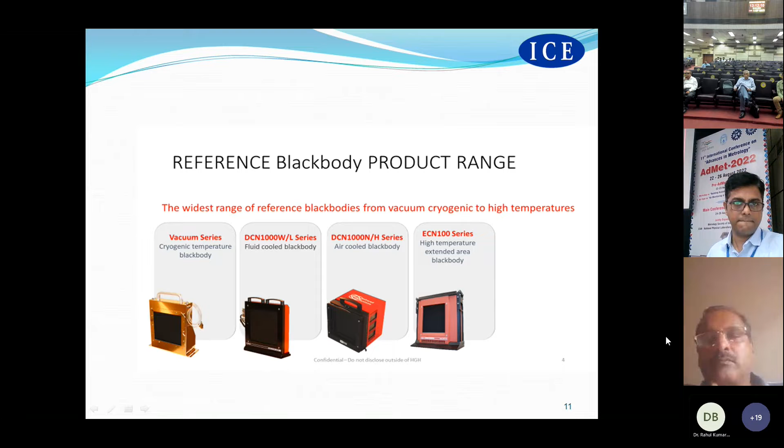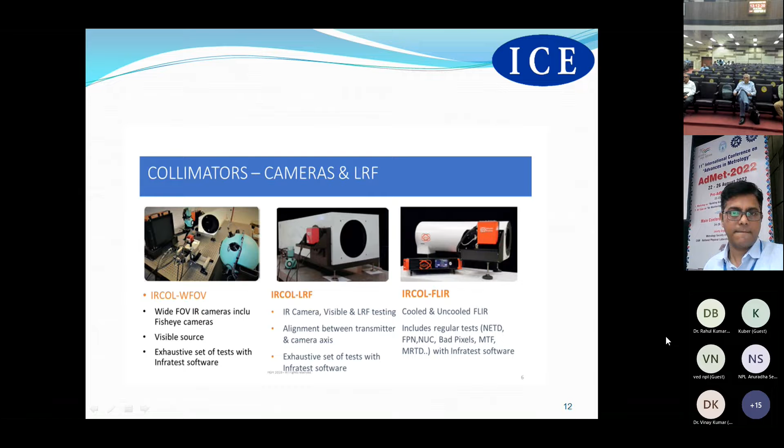We have a few vacuum compatible black bodies, which we already have installed in ISRO and a few DRDO facilities. Then we have collimators for calibrating infrared cameras or infrared detectors. We also have specific software for integrating all these black bodies and IR devices, useful for integration of all the products.

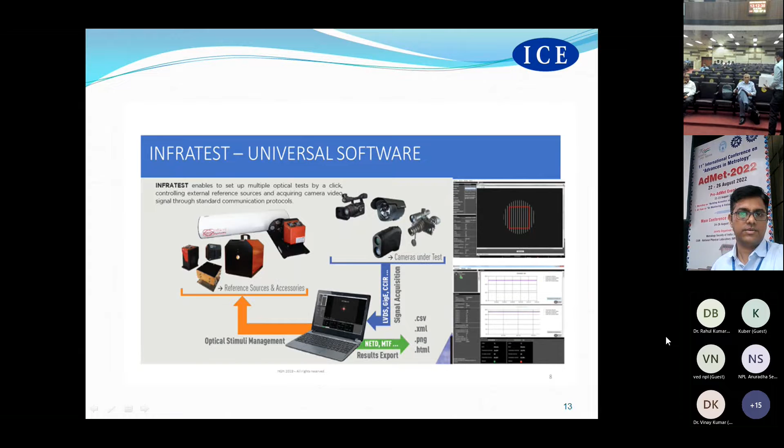Then we have a specific IR test bench for detector development. In this you have different characteristics you can calibrate with the test bench. It has black bodies, a collimator, monochromator, and many bias voltages. You can measure things like RMS noise, fixed pattern noise, and NETD. These are the typical characteristics for an IR detector.

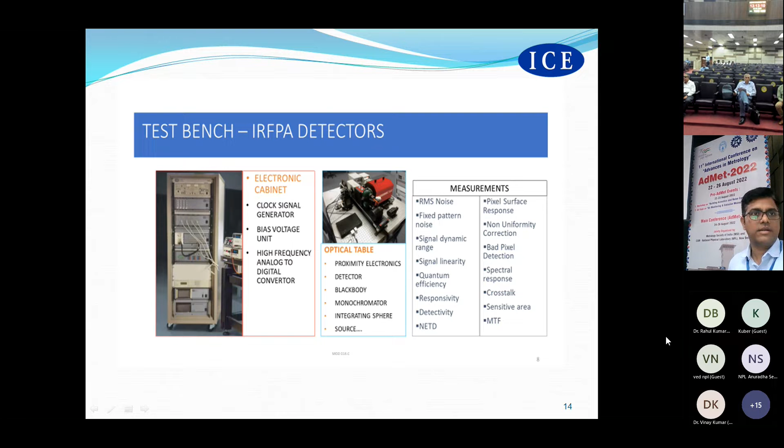So we have the entire setup available, which is already installed in SSPL. Then we have a few IR thermal cameras - these are cooled cameras with very high speed, up to 3000 frames per second. These are also very useful for projectile monitoring or chemical warfare applications.

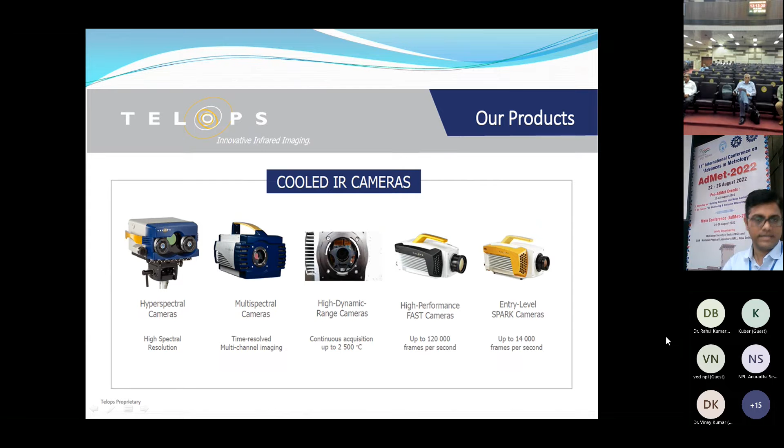So for that, hyperspectral cameras are useful. Then we have very long range cameras also for detecting spacecraft or objects coming from very long distances, for defense activities and all. And then we have a few thermal cameras for NDT application - non-destructive testing for active thermography application. So we will provide an entire solution for this active thermography for NDT application.

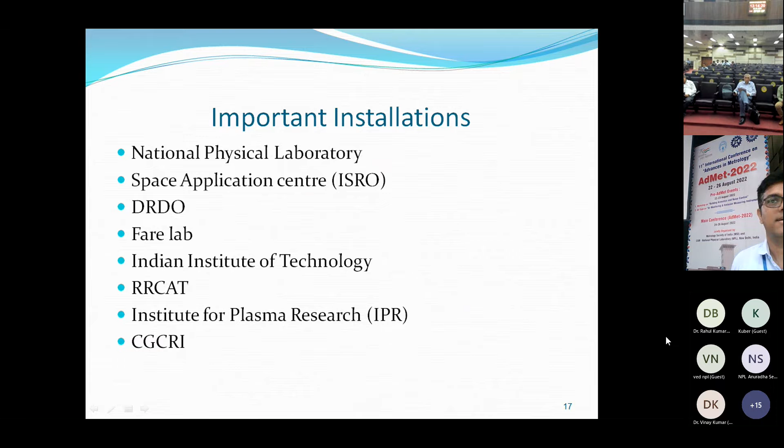Then these are a few important installations for black body and other IR devices. NPL is one of our prestigious customers. We also have installation of a vacuum black body in ISRO. Then we have many high temperature black body installations in DRDO. We have one in Fare lab and one in IPR.

So thank you so much. If you have any questions related to IR measurement, please let us know.

Take a comment or? Yes, we have one installation in Fare lab. So... Okay, thank you so much for your presentation. I think with this, the session is over, or do you have to continue?